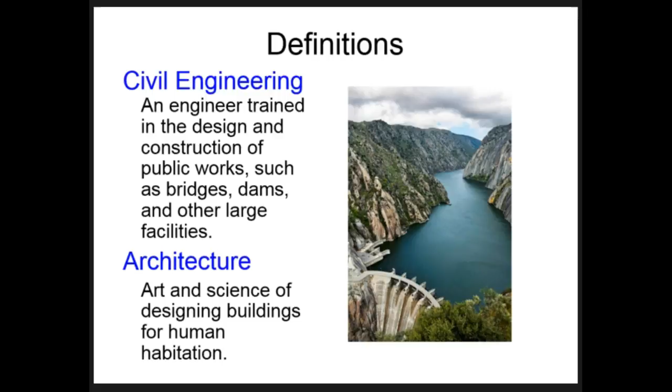So first, here's our two definitions, which we've already seen in previous videos. The beginnings of civil engineering and architecture originated with our ancient civilizations, often with stone buildings, caves, and even the huts and tents we might have seen in ancient civilizations. Often the building materials they chose were because they were readily available in that area.

For example, here's the ruins of Babylon, which is now in the area of Iraq in the Middle East. These were made with mud bricks because the area didn't have a lot of trees or stone.

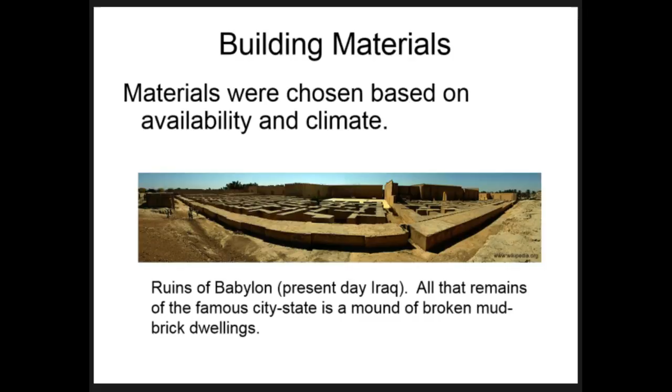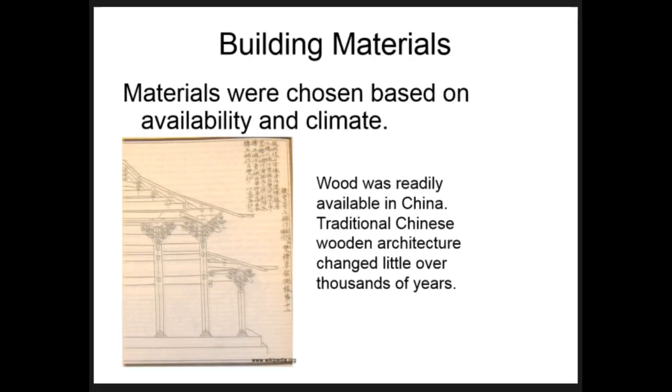The building materials were chosen: Greece, limestone, and marble. In Machu Picchu, we see stone because this is in the mountains. China made things out of wood and paper because they had a lot of wood and materials to make paper out of.

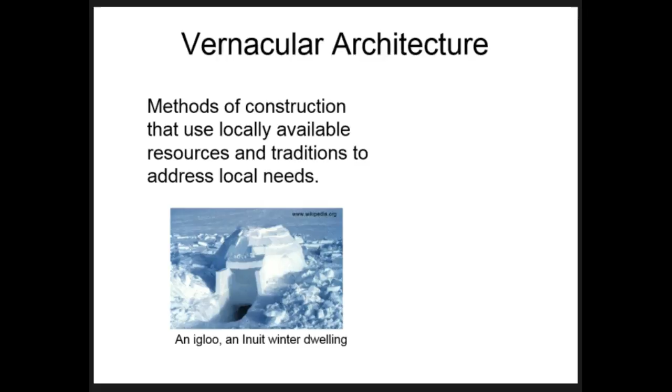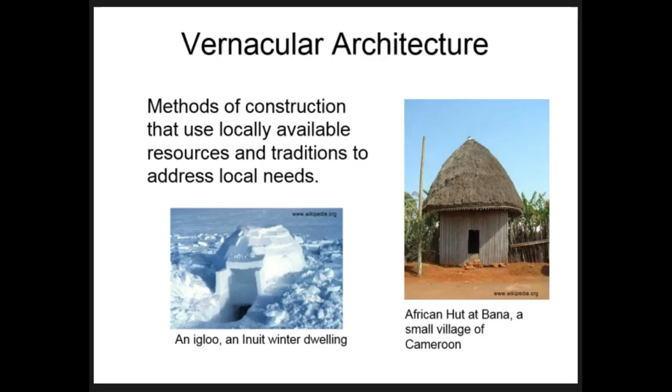In the Arctic and Antarctic, we saw things being made out of ice because that's what was available. In Africa, we see things often made out of reeds and bamboo and lightweight materials because, again, this was available there. Look at each of these and where they are, and determine for yourself what you think these areas had an abundance of.

And this one. What we're seeing here is that just by looking at the architecture in an area, we can tell what is available in that sort of area.

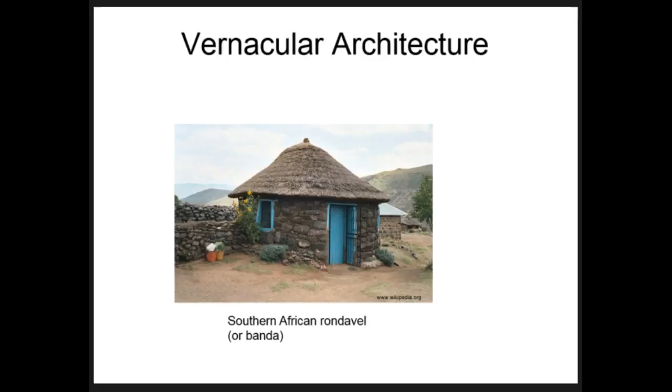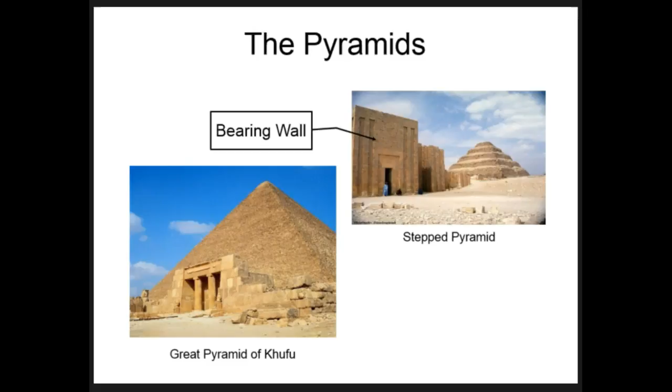One of our vocab words is bearing wall, and we see it in the stepped pyramids. You can look up what a bearing wall is, but basically it's a solid wall that is bearing the weight of the building—it itself is holding up all the weight. You notice very small doors compared to the size of the wall, and no windows.

Arches are another solution. Arches are extremely strong. You'll notice at the top of each one we have a keystone, where all the weight comes together. These, in fact, are put together by the weight of the stones themselves—they don't have to be cemented together with any kind of mortar. The weight itself is what holds them up. They're built by putting a wooden structure underneath while they're being constructed, and once they're up, the very weight and design of it holds it up. We see arches on many very old structures from the Romans and that sort of time period.

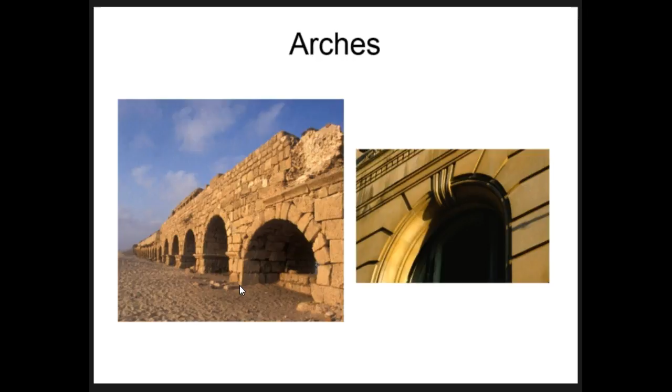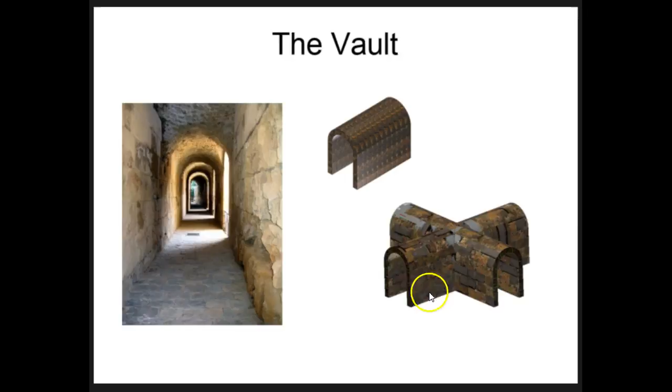Arches and keystones are both some of your vocab words. A vault is basically a series of arches put together to make a long hallway. Here we see a picture and a design. We can also see them coming together to be crossed like this, and that's called a cross vault, where two of these hallways would intersect. The bonus here is all this roof weight is coming down on these upright parts, and we don't have to support the roof separately.

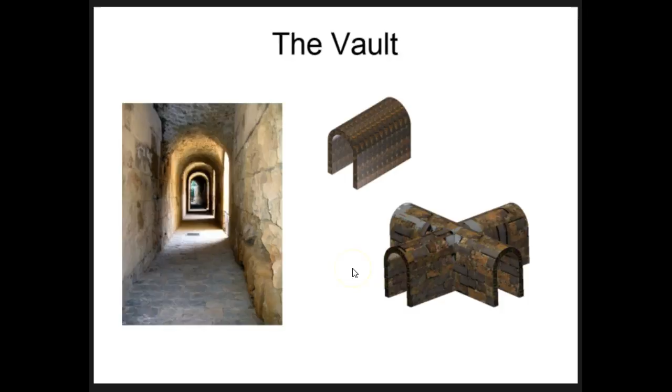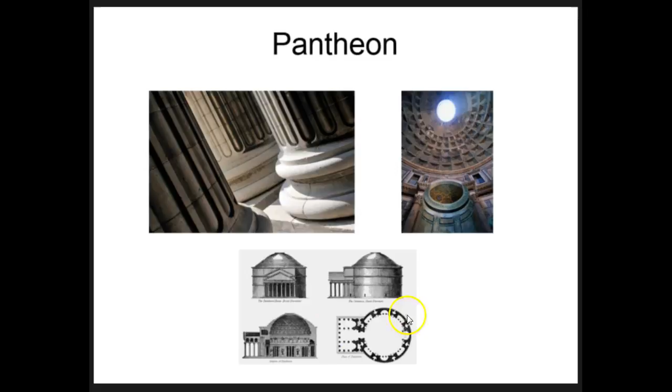Domes. We're familiar with what a dome looks like, it's like a half sphere. Again, this is another one of our vocab words. The Pantheon, here we can see the structure of it. The Pantheon was created with volcanic ash, lime, and a small amount of water. Today we have Portland cement, which has kind of the same materials. This is the first time we see these blocks being glued together.

The water supplies in ancient Rome. Again, this was the aqueducts that were bringing water in. So our very earliest water supply systems were built in ancient Rome. Notice what design we see again. Water is extremely heavy when you're moving it, and they were relying completely on gravity to bring this water down, so it had to be very tall at the top to get the water to flow. Here again we see the arches.

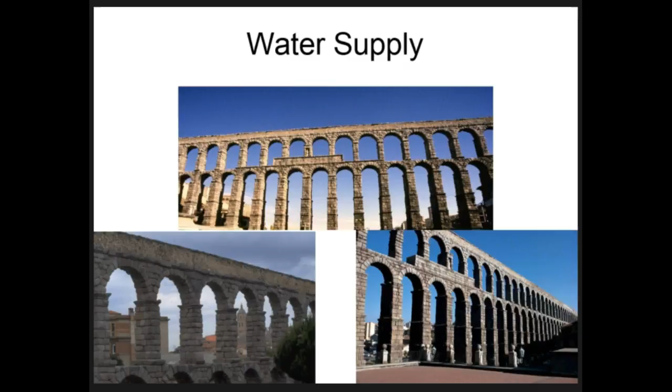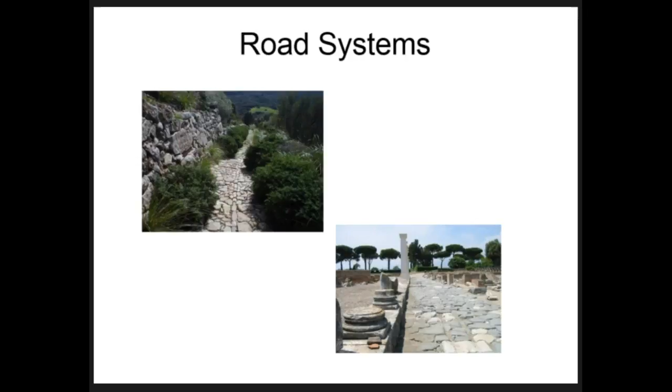Ancient road systems. Ancient roadways were used by the Persians and the Romans, and the width of them was designed to carry the vehicles of that time, and they were very deep and very strong. Many of these roads still exist today because they were built so deep into the ground out of stone.

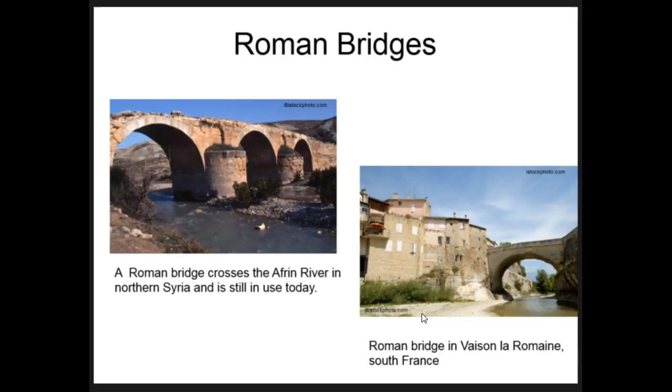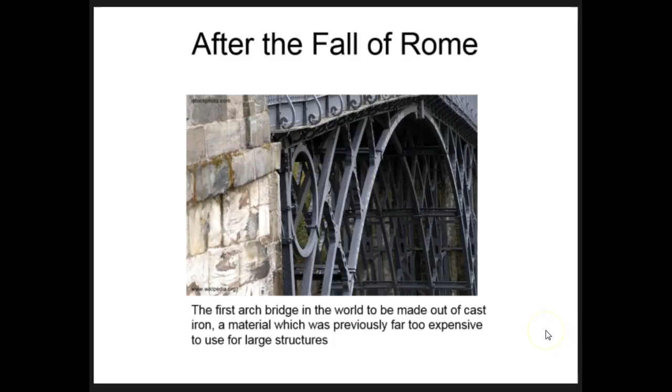Now we're going to look at some bridge designs. These are some of our oldest bridges, and guess what shape we have here? That's right, we've got the arches again. These bridges are so old and these arches were so strong that they have completely withstood time. After the fall of Rome, we start seeing bridges being made out of other materials, like here we have cast iron, which was too expensive before this, but again, look at the structure. Again, we're seeing the arch shape because this is an extremely strong and safe shape.

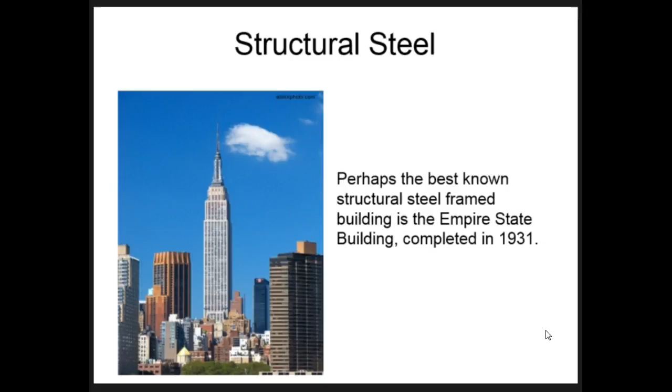Then today, we start seeing steel structures. Here's the Empire State Building, completed in the 1930s. And then we get to reinforced concrete, which is concrete that has steel inside it. That's the reinforcing, it's got rebar inside it to reinforce the concrete. Concrete is very strong in compression, not good for torsion or tensile strength.

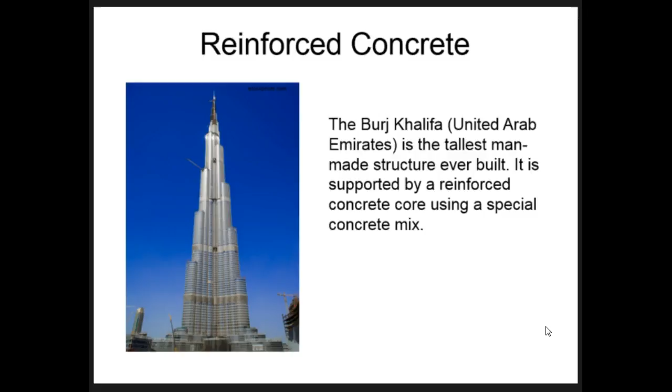So we have to add the steel inside it to reinforce it for those bending concerns, and now we have reinforced concrete bridges. All the bridges and overpasses you're seeing today that appear to be concrete, they're all reinforced with steel.